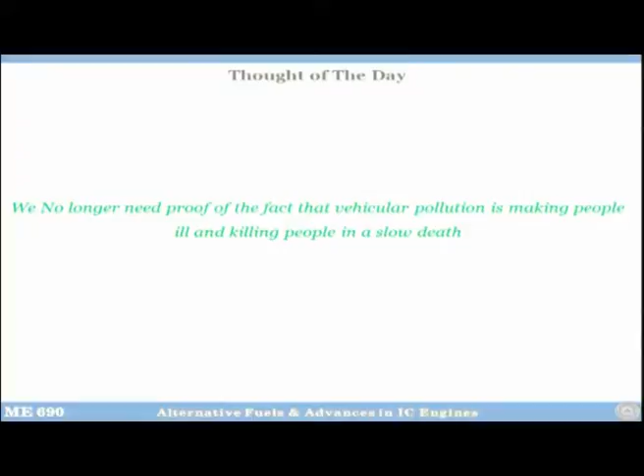I think the most important thing we should realize is that we no longer need proof that the emissions coming out of vehicles are making people sick and killing them in a slow death. It is a proven fact that different types of pollutants and harmful species coming out are having serious impact on human health.

In fact, the World Health Organization has classified the particulate coming out of diesel engines as carcinogens. In 1992, the classification was probable carcinogens, meaning they were not sure, but recently it has been changed to carcinogenic. What this really means is that now they have conclusive experimental evidence that particulate matter is causing cancer in humans.

So, in order to control the emissions coming out of the engines, different emission norms or emission legislations are adopted worldwide.

When you say emission norms, what do you really mean? Emission legislation, as you know, legislation means law. So the emission legislation means a law which deals with the emissions coming out of vehicles or engines. Essentially, if your engine is emitting more than the limits prescribed by the law, it is illegal and you are not allowed to sell that vehicle in the market.

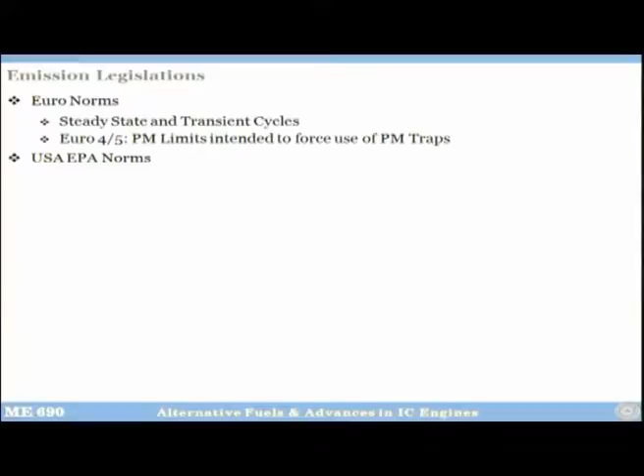Steady state means you have fixed load and speed conditions, and this is more applicable to engine testing. Transient cycle means in a vehicle, load and speed are all the time changing—so transient cycle means changing load and speed conditions. I will show you what this means.

With the implementation of Euro 4 and Euro 5, before that, up to Euro 3, we were able to meet these norms by combustion optimization for both gasoline as well as diesel engines. But since Euro 4 and Euro 5 have come into force in the rest of the world, it has become essential that combustion optimization is not enough.

You have to deploy some kind of exhaust gas after-treatment technology for controlling particulate as well as NOx emissions from the engine. So people have used diesel oxidation catalysts, particulate traps, selective catalytic reduction techniques, lean NOx traps. Many different types of technologies for controlling different emission species have been implemented in order to meet the stringent emission norms Euro 4, Euro 5 and Euro 6 onwards.

Similarly, in the US there is a US EPA norm, and in India we have BS norms. Now let us look at what are these species that we really want to regulate, or what is covered in the emission regulations, and what is not.

So regulated, when you say regulated species, you are essentially talking of 4 important species mostly. These are NOx, PM (particulate), NOx is oxides of nitrogen, and then hydrocarbons and carbon monoxide.

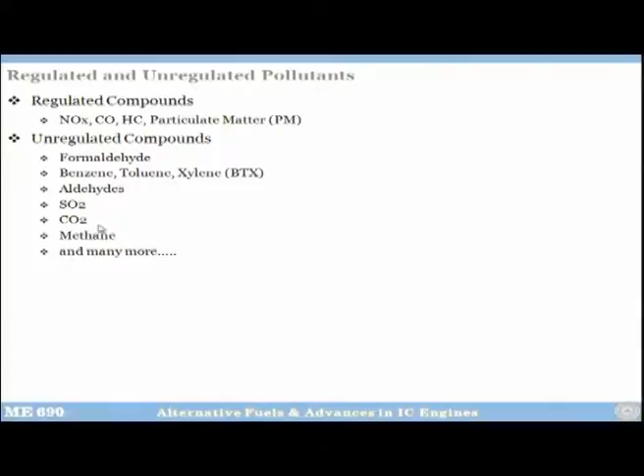And out of that less than 1%, most of these species are regulated species which we try to control. These species are in very, very small concentrations - few ppm, 10 ppm, 20 ppm. These are dangerous levels actually for some of these species. So this is just to put things in perspective of how much pollutants we are talking about.

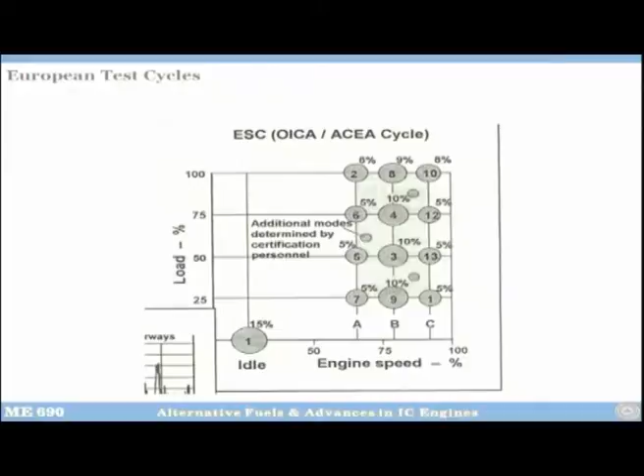So whenever we say emission norms, this is how we do it for the stationary cycle. Now you can ask me this question - if this is the case, how am I going to measure this? Because this is going to be extremely challenging. I have to come up with one number, right.

So if you remember when we discussed the emission measurement equipment, I showed you the CVS system, constant volume sampling system. So this engine is operating, you have an exhaust pipe, and this driving cycle is 30 minutes. As soon as you start driving the engine under this cycle, it will draw the sample and start filling a plastic bag which was already evacuated. So at the end of the 30 minutes, the bag will become full and it will have emissions formed at each load and speed, and even transient conditions.

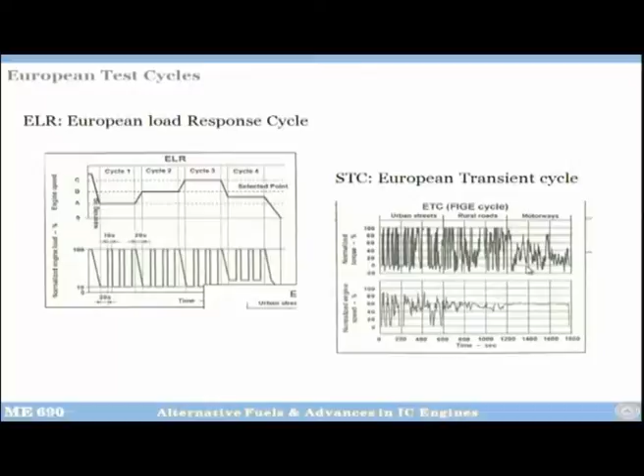So now what I have to do? I have to do just one measurement from that bag and I will have my number, isn't it. So this is how you do the measurement in transient cycles. I hope you have understood how the emission norms are made and how the measurements are done. Is that clear?

So now I will show you the emission reduction strategies, because many of you will go to the automotive industry where your job will be to meet the emission regulations. Emission regulations are becoming more and more strict by every day.

So the first strategy is that if your engine is not an EGR engine, then you put EGR plus a soot trap. Second strategy will be that you put exhaust gas after-treatment for NOx. And then third strategy will be that you go for EGR plus trap plus after-treatment for NOx.

So in strategy 1, when you put EGR and trap, what you are essentially doing is that by putting EGR, we know that EGR is going to reduce only the NOx emission. So NOx reduction with EGR is done, then once you put EGR, you know that you will be forming a lot of particulates, so that particulate reduction is done by this trap. So this is one simple, easiest way to meet Euro 4 or maybe possibly Euro 5.

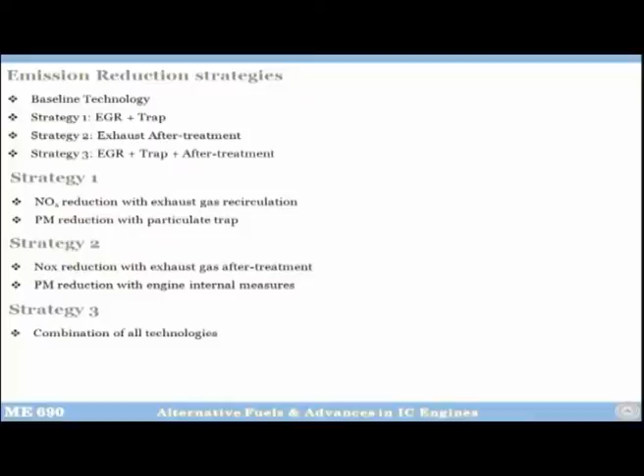The second strategy will be that you do NOx reduction with exhaust gas after-treatment. So you employ some kind of NOx after-treatment technology. Two main technologies are there. One is called SCR, selective catalytic reduction, where you use urea to generate ammonia - you hydrolyze the urea and break it down into ammonia and water, and ammonia is a very strong reductant. When ammonia reacts with the NOx, it converts it to nitrogen and water. So that is one system.

The second system is the lean NOx trap system. I will discuss these systems briefly in my next class.

Then the second strategy is that since you have NOx control by exhaust gas after-treatment, what essentially you can do is run your engine as hot as possible. That means you can put in your combustion strategy such that the engine is running hot, and when the engine runs hot, there will obviously be lower particulate formation inside the combustion chamber, but there will be more NOx formation. You don't worry about NOx because anyway you are going to kill it by the after-treatment system.

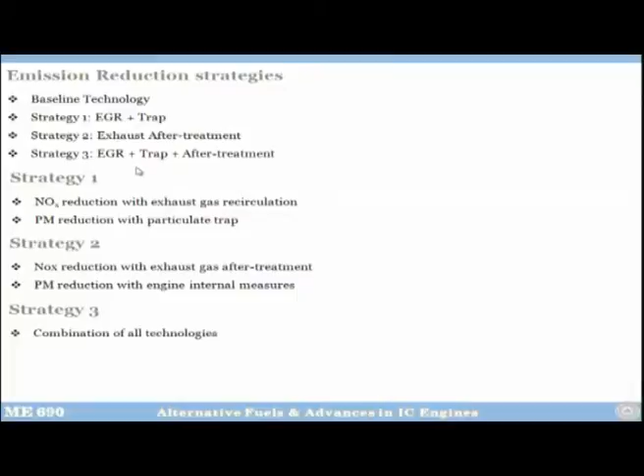So this is the second strategy, and the third strategy will include everything - you have EGR, you have soot trap, and you have NOx after-treatment. Using this you can meet Euro 6 fairly easily, or even Euro 7 for that matter. Once you combine everything, it is a piece of cake.

So we know that we have to meet the emission challenges. This is one of the biggest challenges that automotive manufacturers actually face today. So if you want to meet the emission challenges, what all handles have you got, what all changes will be required to make? First thing is that you have to make a huge change in the fuel system.

Right now you must have seen that earlier diesel engines used to have mechanical fuel injection systems, then there were rotary fuel injections, inline systems, rotary systems, high pressure systems, and then came electronic fuel injection, then finally CRDI. So in this process of evolution of injection systems, we have gone all the way from the most inflexible mechanical system to the most flexible CRDI system. So this is one area that will give you a lot of handle to control the emissions.

Second is that you can do variable valve actuation, so that means the valves are opening and closing using a solenoid.

This is called VVT, variable valve timing, which is coming in right now in very high end cars. But as the solenoids get cheaper and controls get cheaper, I think in 5 to 10 years time, even in cheaper cars this will be available.

Of course, turbocharging gives you a lot of handle because it reduces emissions and gives you more power. I have discussed this in detail. There is an EGR system, so you circulate a lot of exhaust back into the system, that also controls emissions. Then you have intelligent control, which basically means use of ECU and a lot of programming, calibration system, engine calibration. And then you use clean diesel fuels and clean gasoline fuels. You employ a lot of sensors, and you have PM filters, NOx absorbers, after treatment technology essentially.

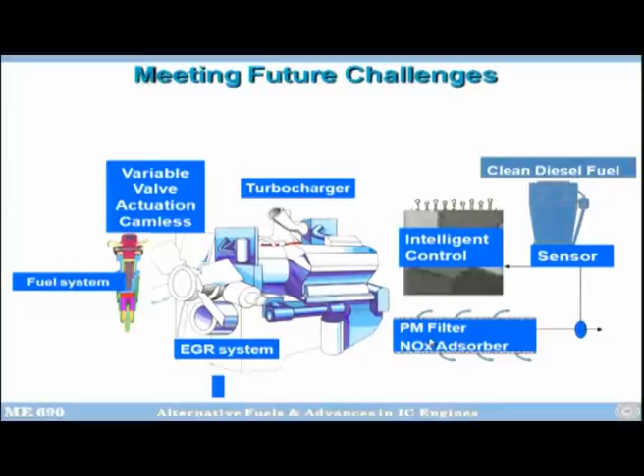So you have to look at all the factors that are possible in an engine in order to meet the emission challenges of the future. You have to basically control the formation of the pollutant in the cylinder by controlling the air handling system, the fuel handling system, electronic control systems, and after treatment system for PM and NOx reduction.

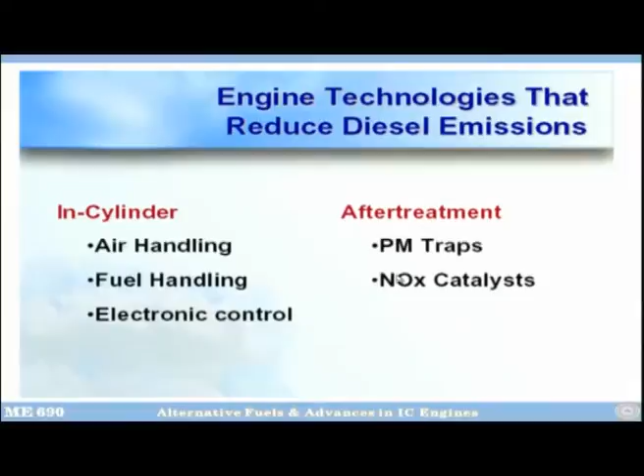Now, I want to show you some global trends, and then we will discuss. Just look at the trends, global trends in light duty diesel PM control. Light duty vehicles means something similar to cars, cars and SUVs, these are light duty vehicles. Heavy duty vehicles are like trucks. So you all know this.

So if you look at the PM, this is given in grams per kilometer. One thing you have to understand, when you say emission compliance, there are two types of units given. One is grams per kilowatt hour, which means the testing has to be done on the engine dyno, because the engine is going to produce some power, and how much power it produces will be known via a dynamometer. So the units correspond to kilowatt hour, grams per kilowatt hour - emissions are in grams, kilowatt hour is the power produced. So per unit power produced by the engine, how much emissions you are putting in. If the units are grams per kilometer, that means you are testing the whole vehicle, because in the vehicle you never know how much power is being produced, but the vehicle drives. So this testing is not done on an engine dynamometer, this is done on a chassis dynamometer.

Chassis dynamometer really means you have an entire vehicle in a big room, and the vehicle is standing on rollers. When you put it in gear and start the vehicle, the rollers also start rolling. Of course, you have to tie the vehicle very tightly with ropes, so that in case the roller gets jammed, it should not run away. So you make all the safety provisions, and then you have to blow the air - big fans are required, because the vehicle should experience the same conditions as it experiences in the field. In the field you have natural draft because the vehicle is moving fast, but inside a room there is no draft, so you have to create some artificial draft. So the vehicle remains stationary, wheels are rolling, and there is a big draft of air given to the vehicle. So if you are doing the testing on the chassis dynamometer, the units will be grams per kilometer.

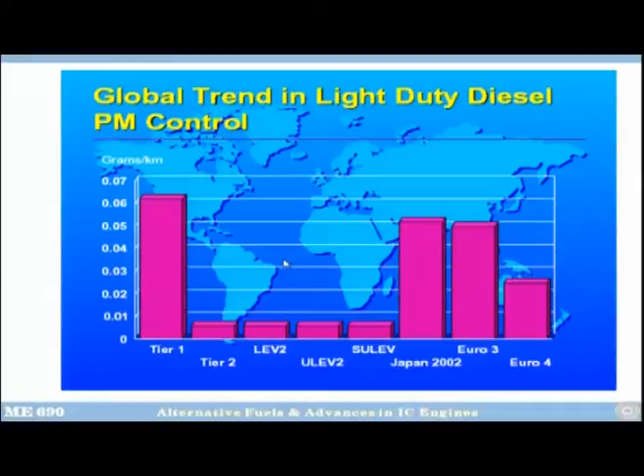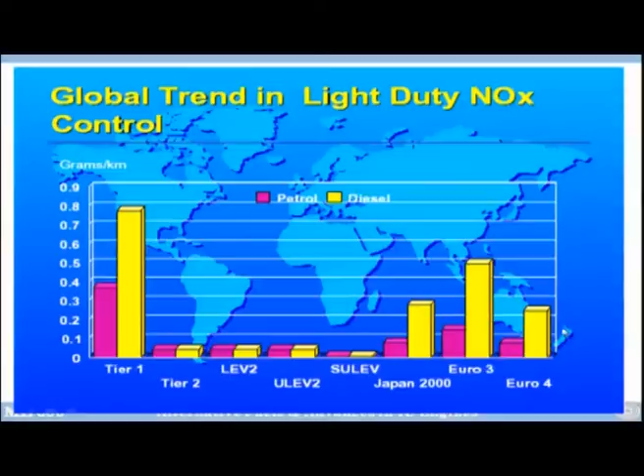Similarly, trends for light duty NOx control - these are the petrol vehicle as well as diesel vehicle. Petrol is in red and diesel in yellow. You can see this is also in grams per kilometer, this is 0.9 grams per kilometer, and you can see the same trends. From Euro 3 to Euro 4, it is going down, comparing different types of emission norms.

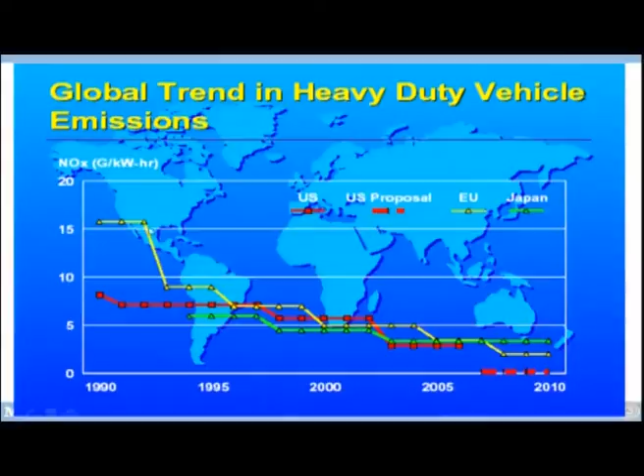Now, the question is that NOx is going down, PM is going down, and we know that if you want to control NOx, the PM goes up; if you want to control the PM, the NOx goes up. How do you control both of them? So, it is quite challenging. By some examples I will try to explain how people have attempted this in the past, and if we learn the past well, we will be able to deal with the problems in the future in a similar way.

So, emission reduction strategy and heavy duty standards for 1998, 2002, 2004 and 2007 US norms. This is US EPA 1998. It was allowed to have particulate emission of about 0.1 grams per brake horsepower hour, and it was allowed to have NOx emission up to 4 grams per brake horsepower hour. This is 1998, about 20 years back.

So, this is where we are, and obviously as the emission norms get tighter and tighter, you have to move closer to the origin. That is your journey path. This was the envelope for US EPA 1998. When we implemented US EPA 2002, this was the envelope. Then 2004, and this was US EPA 2007. So, you can see what kind of stringent tightening was done.

So, from here to here one could move by reducing the sulfur level to 350 ppm, combustion system optimization, high pressure fuel injection system, cooled EGR. From 2004 you have to come to 2007 levels, which is very, very small. So, from 0.1 you have to come to 0.01, and from 2.5 you have to come to 0.25. That's a 10 times NOx reduction, 10 times PM reduction in a period of 4 to 5 years.

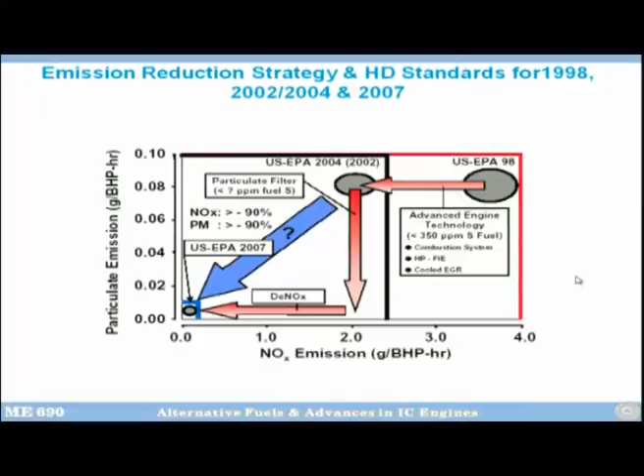If you look at the basic engine technologies used for emission reduction, first is combustion optimization. Second is 4-valve technology. Earlier there used to be only one inlet, one outlet. Now there are 4 valves, 2 inlet, 2 outlet. Gas exchange becomes more efficient, which also helps reduce emissions.

Then optimization of the combustion chamber air motion, because air motion inside the combustion chamber affects the fuel air mixing, and fuel air mixing affects the particulate formation and also NOx formation and other pollutant formation.

High pressure fuel injection such as common rail and unit injectors also employ very high injection pressure. Common rail can go easily up to 1600 bar, unit injectors up to 2500 bar. Higher the pressure, smaller will be the droplet size of the fuel injected in the combustion chamber. Smaller droplet size means better mixing of fuel and air, and if mixing is better, the delay period will be smaller, combustion will be more efficient, therefore pollutant formation will also be relatively lower.

You can retard the injection timing to reduce emissions, use EGR, use turbocharging, do electronic control of the injection. You can use gasoline direct injection technology, or HCCI technology to control emissions—we have discussed this in detail. On top of it, you can use cleaner fuels such as compressed natural gas, liquefied petroleum gas, biodiesel, ethanol, methanol, dimethyl ether, and ultimately hydrogen in order to control the emissions. So you have a host of things you can do to control emissions from the engine.

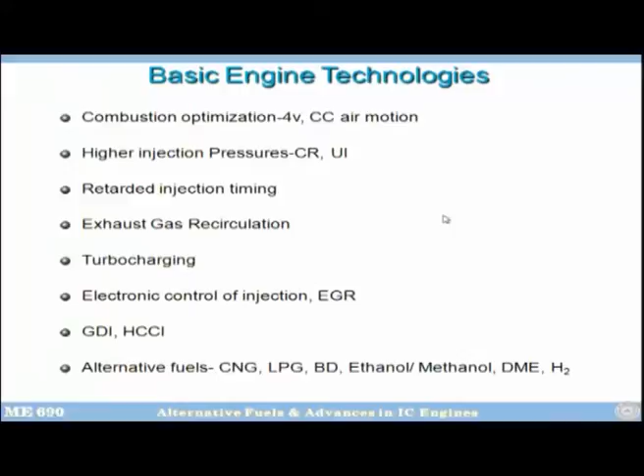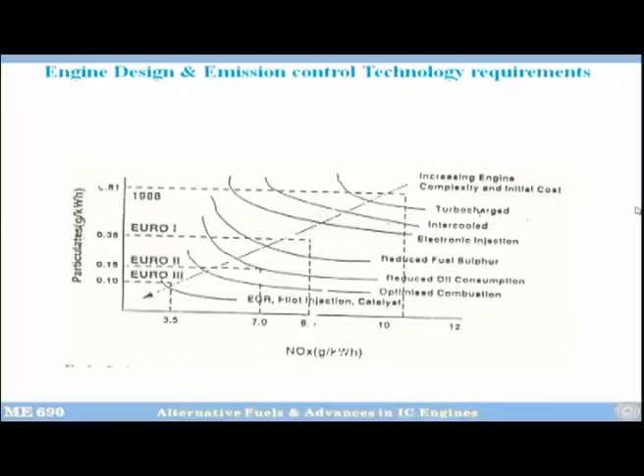Again, this is also a similar type of graph, but with one more piece of extra information. This is particulate on this side, NOx on this side, and here you also have brake specific fuel consumption, which is what most people are most interested in. If you look here, this is Euro 3, this is Euro 4, and this is Euro 5.

So here you see this is the measured data for optimized combustion, 2 liter per cylinder class of engine, without EGR. So you have to basically come here. First you are here, you want to come here, and then you want to come here, finally you want to come here. This is US EPA 2007, which is even more stringent than Euro 5.

So what you do is you can operate the engine here, or here. You operate the engine at very high temperature so that particulates are low and NOx is high, and then from there you put SCR. If you are using 65% efficient SCR, you come here. If you put 80% efficient SCR, you come here.

This is measured data with cooled EGR without trap. So if you are using EGR but without trap, you operate here, and from here if you put a soot trap, you can come here. So you can see these are the two methods: one is you run the engine hot, then put the SCR, and depending on the efficiency of the SCR, you can meet Euro 4 or Euro 5. Or, this one without EGR, this one with EGR—you use the engine with EGR and then put a trap, and then you come here.

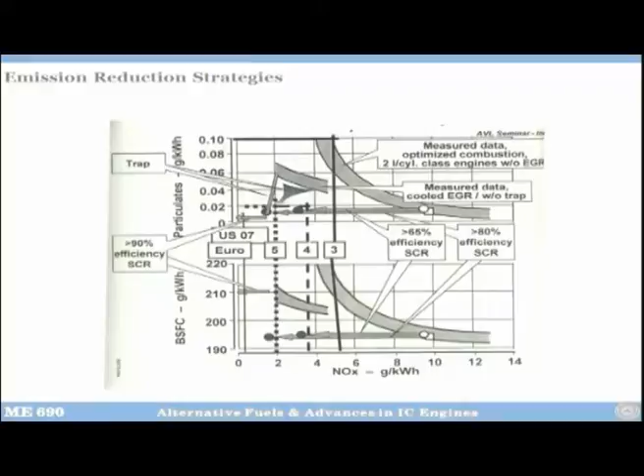When you are operating the engine with EGR, EGR has some fuel penalty. That means you control the NOx emissions, but fuel penalty is there. And when you put a soot trap, you are burning soot outside, so it does not affect efficiency. Using this strategy, you operate the engine at 210 grams per kilowatt hour. So essentially the difference between these two is 15 grams per kilowatt hour, which translates into about 8-10% better fuel economy.

So the advantage of using EGR and particulate filter is that very low particulate emission can be achieved using the particulate trap. But the technical challenges are that you need an EGR compatible combustion system.

Now what does it mean? It means that some of the exhaust goes back into the intake, forming particulates. If you do not remove the particulate, those particulates will go into the intake system, into your combustion chamber. They will stick to the cylinder walls, and come in between the piston ring and the liner, causing contamination of the lubricating oil, which causes wear of the engine.

So you have to clean the system, you have to make the EGR compatible combustion system. You need a robust recirculation system which can control the EGR very precisely. Right now, in most Indian cars, it is either EGR on or off.

In some conditions there is no EGR, and when it is on, it's a fixed quantity, you can't really vary it. However, if you really want control, you should be able to vary the EGR from 1%, 2%, 3%, going all the way to 15-20%. But this kind of fine regulation also requires very sophisticated valves, which increase the cost.

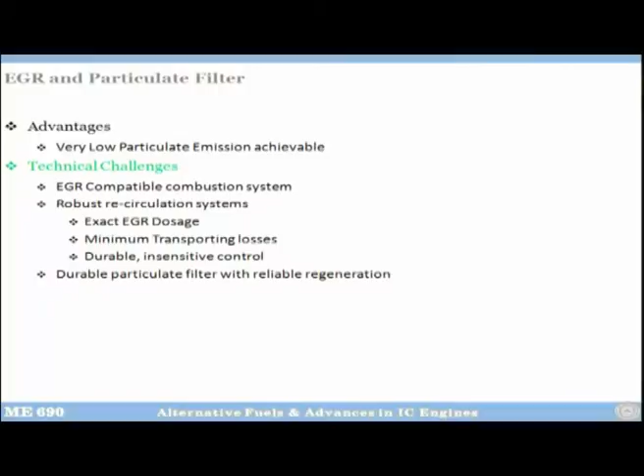With exact dosage of the EGR, you will be able to optimize your system better, with minimum transportation loss from the exhaust to the intake. You need durable and insensitive control - insensitive meaning that if there is deposition in the EGR system, it should not affect the quantity that is going in.

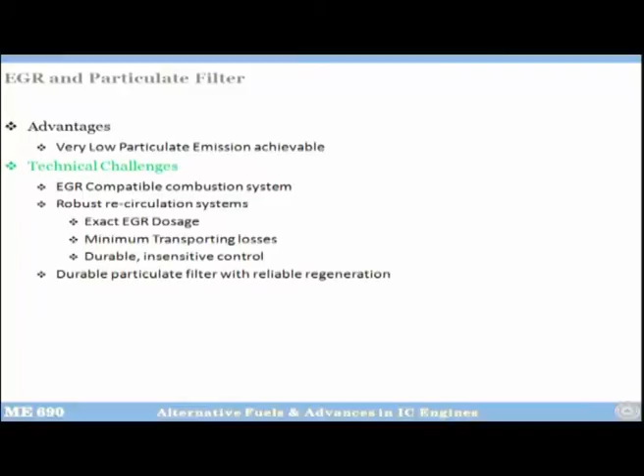And then you need a durable particulate filter with reliable regeneration. You need to definitely put a particulate filter before the exhaust is sent back - a system which is durable and which you can regenerate very quickly and effectively.

Now, India, as I told you, started on its journey of emission control. What was done initially - I am talking about the period around year 2000, we started in 1992, and by 2000 it was fully clear that we have to go full steam. So we implemented norms on 2 and 3 wheelers: lean fuel air ratio and electronic ignition was advocated.

Earlier there were just carbureted systems, and even now some vehicles are available with carbureted systems. There was air fuel ratio improvement, improvement in compression ratio, improved combustion chamber design, and better scavenging. Scavenging is normally a 2-stroke phenomenon, but 2-strokes are anyway phased out, so this is not really very relevant now.

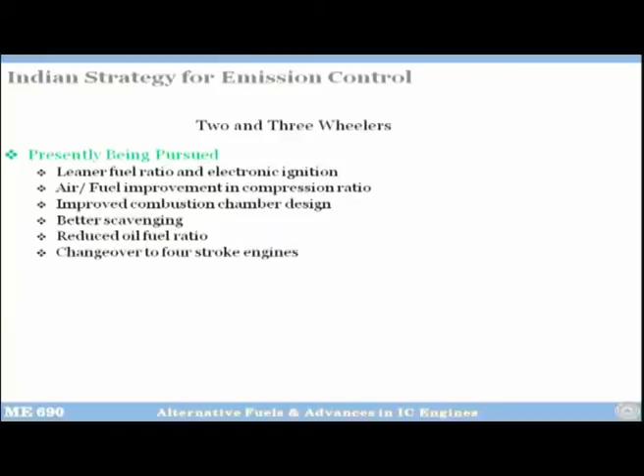There was reduced oil to fuel ratio, then change over to 4-stroke engines. This I am talking of year 2000 - it was mentioned at that time that 2-strokes have to be phased out slowly. Now we do not have even a single 2-wheeler being sold in this country which is a 2-stroke engine, all are 4-stroke. And then use of catalytic converters.

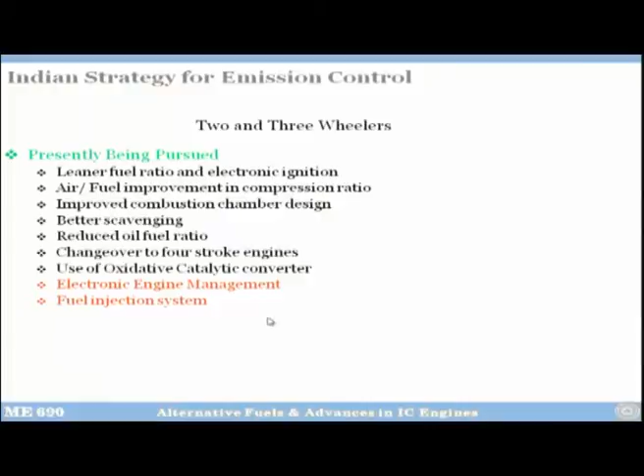Now all 2-wheelers are equipped with catalytic converters. Electronic engine management systems have also come into most engines - there will be some kind of small, very primitive ECU, but a very cheap ECU is put in. Then most engines now have fuel injection systems, and 4-stroke engines with catalytic converters.

For petrol passenger cars also, different options have been implemented. For example, optimized air combustion and ignition timing control has been done, catalytic converters have been introduced, positive crankcase ventilation systems have been introduced, and evaporative emission control systems.

Positive crankcase ventilation means that in gasoline engines, when the fuel air mixture is compressed and the piston is going up, some of the fuel air vapor escapes to the crankcase. The crankcase is not airtight - there is a dipstick rod and many places from where it can escape. If it escapes, hydrocarbon is going into the environment. So what is done is you have a positive crankcase ventilation system, so the escaping emission goes back to the intake, getting another opportunity to burn inside the combustion chamber, instead of being allowed to go into the environment.

Evaporative emission control system means that whenever you fill the tank, the tank is actually not empty, it is filled with vapors of the fuel. When you fill the liquid, vapors go out, so can you capture them? It's not really an insignificant quantity, about 2 grams of fuel goes out when you fill your car. So can you capture it and use it again? That is called evaporative emission control system.

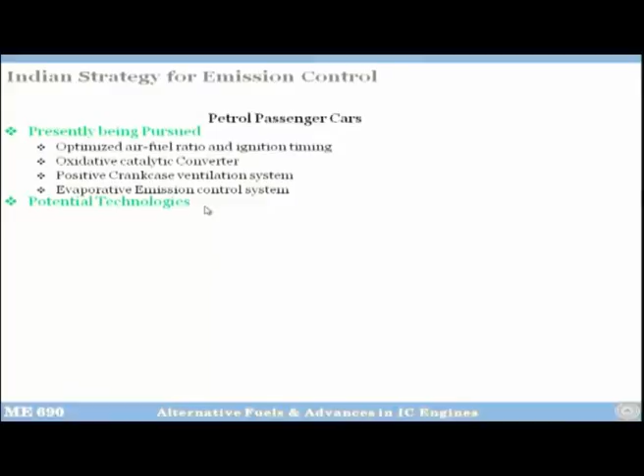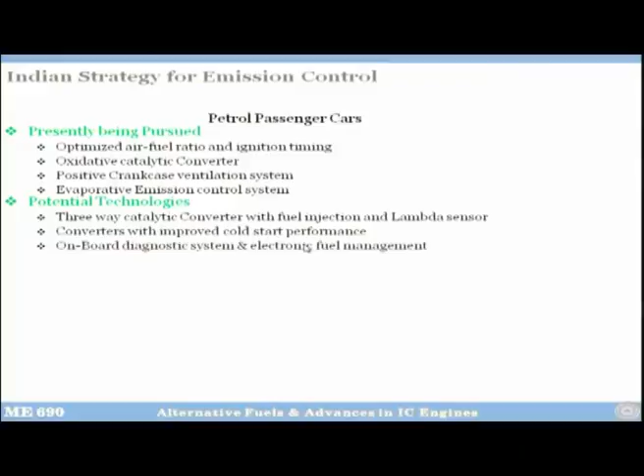A potential technology includes 3-way catalytic converter with fuel injection and lambda sensor, which is implemented in most systems, converters with improved cold start performance, onboard diagnostic system, and electronic fuel management systems.

For diesel vehicles, turbocharging and aftercooling or intercooling is done, combustion optimization is done, reduced oil consumption through engine design improvements is done, higher injection pressures are employed, better fuel spray patterns are also employed. Indian OEMs have also understood the importance of spray optimization, then retarded engine timings, electronic engine management systems, EGR, oxidation catalyst, particulate traps, and finally NOx catalyst.

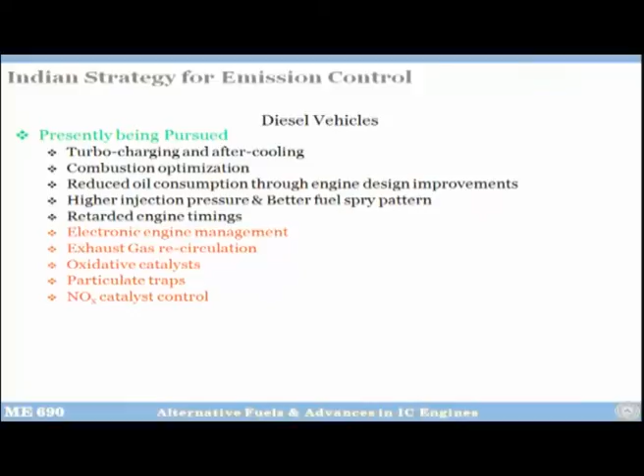Particulate traps and NOx catalysts are still not introduced in India in most vehicles. Some vehicles may have them, but in times to come, once we implement Euro 6 in April 2020, we will definitely require both of them.

If you look at the regulated emissions and long term exposure problems, CO emission is more evident in petrol engines because of stoichiometric combustion. Long term exposure can prevent oxygen transfer in the blood because hemoglobin gets converted into carboxyhemoglobin, which is a very stable product, and you can actually die if you inhale carbon monoxide too much. If you have small exposure, you get nausea and headache.

Hydrocarbon emissions are again a main problem from petrol engines. This also causes headache, vomiting, and disorientation.

NOx emissions are more prevalent in diesel engines, also from petrol engines, but more prevalent from diesel engines, and their exposure can cause nose and eye irritation and damage to lung tissues. Because NOx, NO2 reacts with water, it forms nitric acid, weak nitric acid it may be, but it creates a lot of problems.

Particulate emissions are also the main problem from diesel engines and also from GDI engines, gasoline direct injection engines. They can harm the respiratory tract and also reduce the functionality of the lungs.

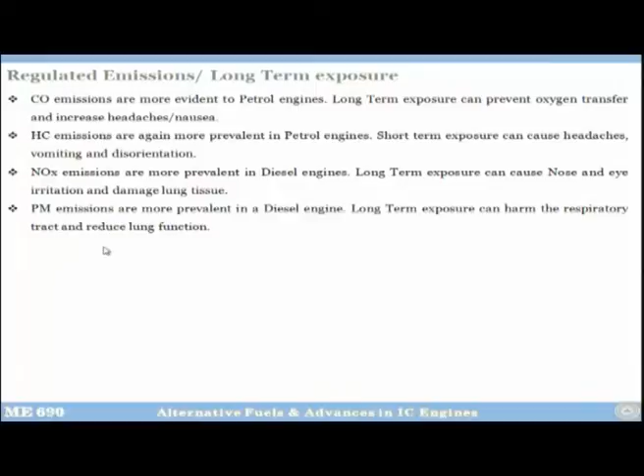Bharat stage norms were first introduced in 2000. They are the emission standards set up by the central government. When you say central government, essentially CPCB, Central Pollution Control Board, regulates the output of air pollutants from IC engine equipment, including vehicles. Different norms are brought into force in accordance with the timeline standard set up by the CPCB, which comes under the Ministry of Environment, Forest and Climate Change.

Bharat stage norms are based on European legislation, basically nothing but a copy of European norms, except that in Europe the driving cycle goes up to 120 km per hour, while for BS norms it goes only up to 90 kilometers an hour. Why? Because in Europe you can drive at 120, so it's more representative for them. In India, where were the roads except now? There were no roads where you could drive 120. Of course, with time we will change that also, because in India roads are improving, now you can do 140.

India is one country where we have split our country into two emission regulation zones. One is a set of 13 cities where there is a different emission norm, done on an experimental basis, and then we have the lower emission norm in the rest of the country, which slowly catches up. The reason is that if you change from Euro 3 to Euro 4 all of a sudden, oil marketing companies have to make available Euro 4 fuel everywhere in one go, which is a logistical nightmare. So what they do is introduce it in 13 cities, providing Euro 4 fuel there and Euro 3 lower norm fuel to the rest of the country, and then within a year or two they develop capacity and slowly phase out Euro 3 and go to Euro 4, and likewise.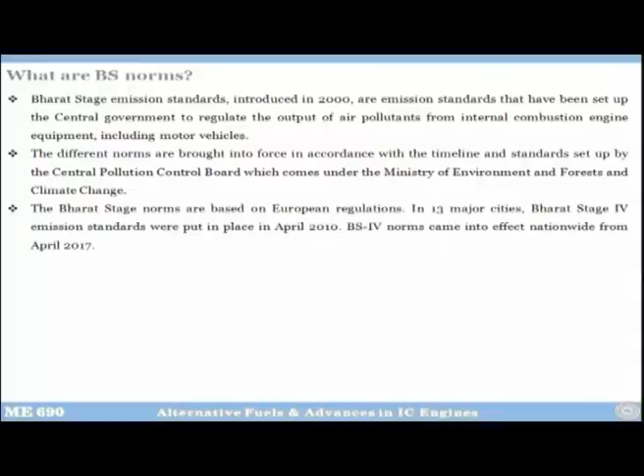So Bharat stage 4 was implemented in April 2010 in 13 major cities, and in the whole country it was effective since April 2017. This gives a time of around 7 years for vehicle manufacturers and also oil companies to basically clean up their act, if I can put it like that.